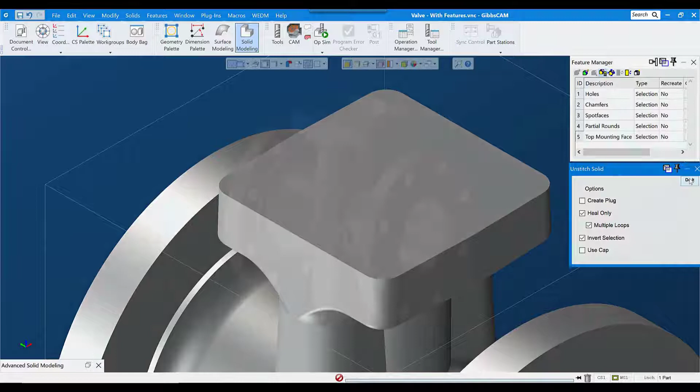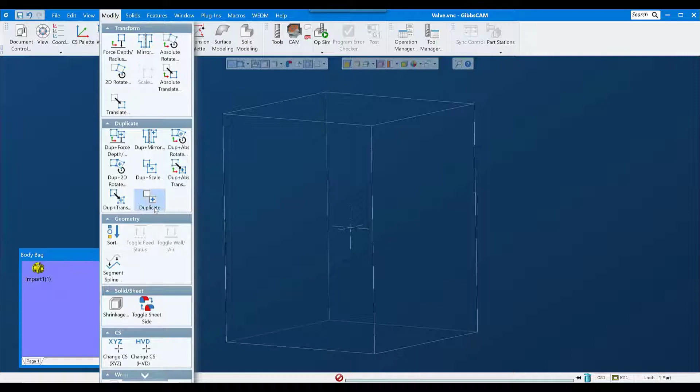This valve body is a fairly straightforward part to program, but we'd probably want a casting model, both for accurate material only calculations and to make the simulation more realistic. So I will start by placing the model in the body bag by double clicking it. While it's still selected in the body bag, I'll go to the Modify menu and select Duplicate. The shortcut key for duplicate is Control D, and that gives me a copy of whatever was selected when I duplicated.

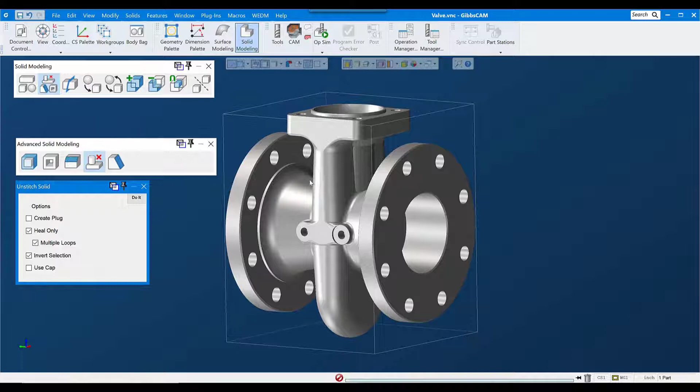I'll leave the original model in the body bag and leave it alone, don't want to change it, and I'll modify the copy. Now under Solid Modeling and Advanced Modeling, the fourth button over is Unstitch Solid. Unstitch Solid allows me to remove features from a model. And there's two modes I can use, especially for holes. The first is Edge Selection. If I turn edges on, I can select the top and bottom edge, or really any edges in a single void that break out of the model, that break out into open air, and click Do It.

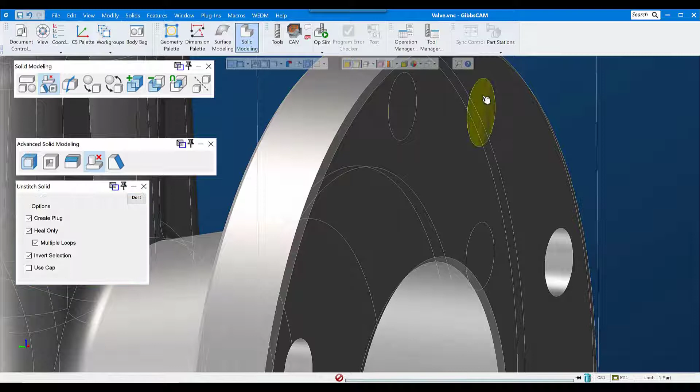Now notice that there is a Create Plug choice here. If I turn that on, there will be a negative of the space that's filled in created, as well as removing that space from the model. So here's a plug that represents the negative of that hole. Typically you would use this for core and cavity or some other situation where you need the negative of that void. Generally speaking, I'm going to leave that off for work like this.

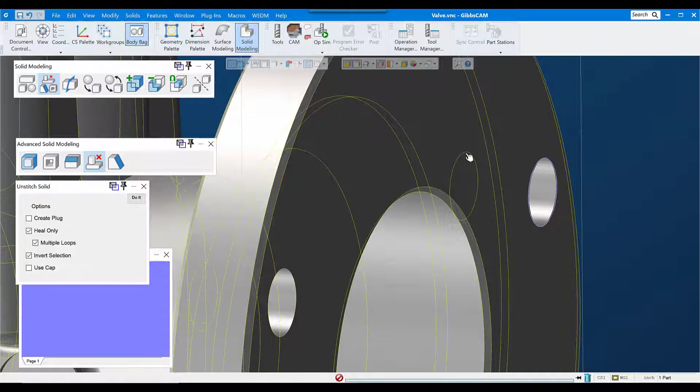The limitation to selecting edges for unstitching is that I can only do one void at a time. If I try to do multiple voids, I get a message saying edges split body into more than two face sets. So I'm limited to one edge set at a time.

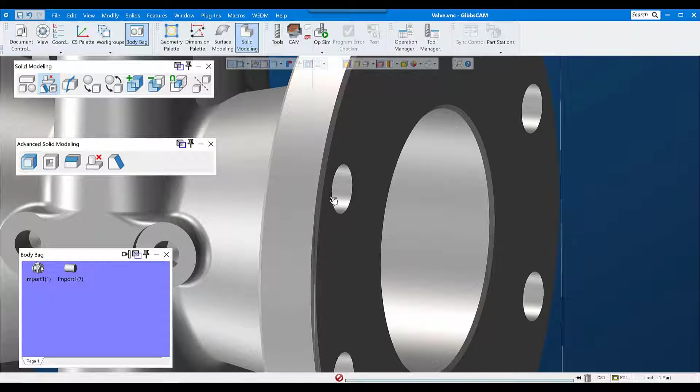Now the other mode that I can use is face selection. Face selection allows me to simply select all the faces that make up that hole, and on simple holes like these, this is probably the fastest, easiest way to do it. I get the same result as with edge selection, with the exception that I can select multiple holes or multiple voids at one time.

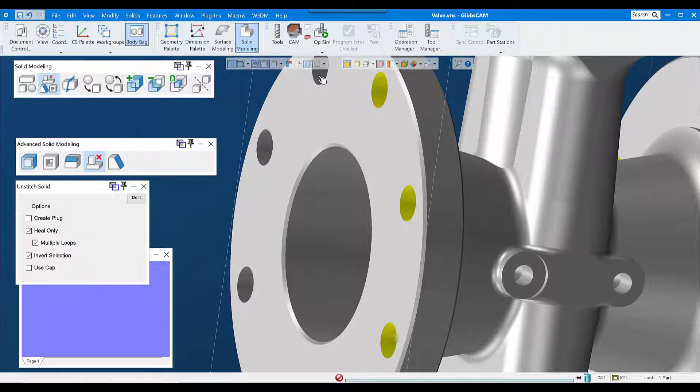But you need to remember that I have to select all of the faces that are part of that hole. So on simple holes like this, it's fairly easy and straightforward, but on more complex holes, it can be time consuming or difficult to get all those faces selected. We'll go ahead and remove these holes up here while we're at it.

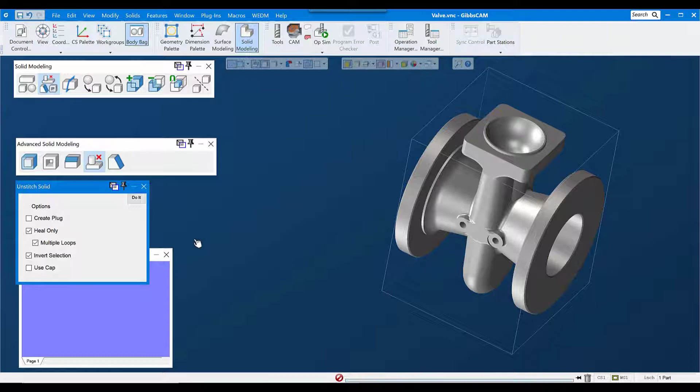Another use that I can put Unstitch Solid to is removing other features such as chamfers and fillets. As long as the software can merge the faces on either side of what you're unstitching, it will successfully unstitch.

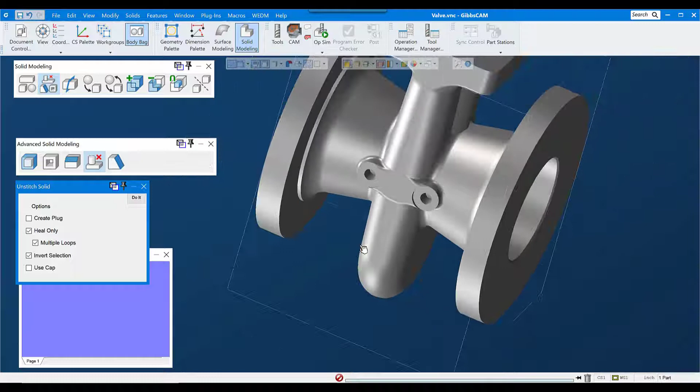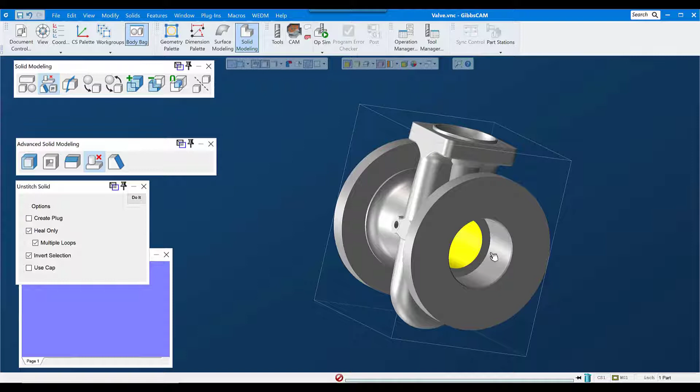Now, to remove this big cavity here, it's pretty easy to see that we have three places where that breaks out into open air, but in reality we have five because these holes also intersect that same void. So it would be a bit tedious and possibly difficult to reach all the faces that we need to reach to do face selection. So for this, I'm going to go back to edge selection and select the edges where this breaks out into open air. So we'll get the three big ones, as well as these two smaller ones.

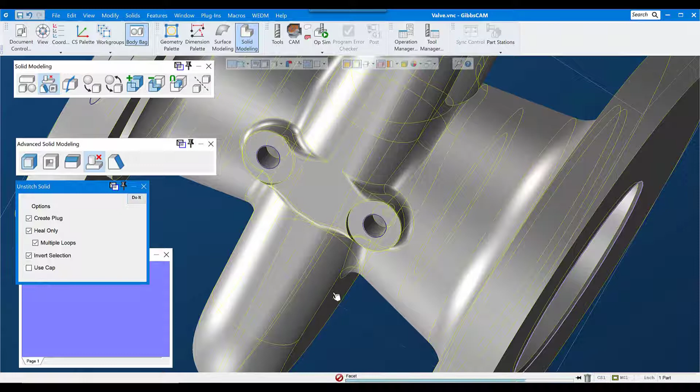And we'll unstitch that. Now in a situation like this, sometimes it's handy to turn on Create Plug, which can give us a negative of the space that was filled in, which sometimes is handy for making sure you understand exactly what's going on inside the part. In this case, it's really not necessary. I'll go ahead and delete it and bring our model back out.

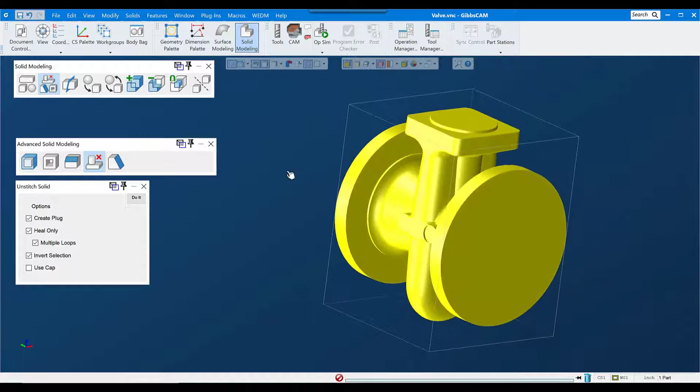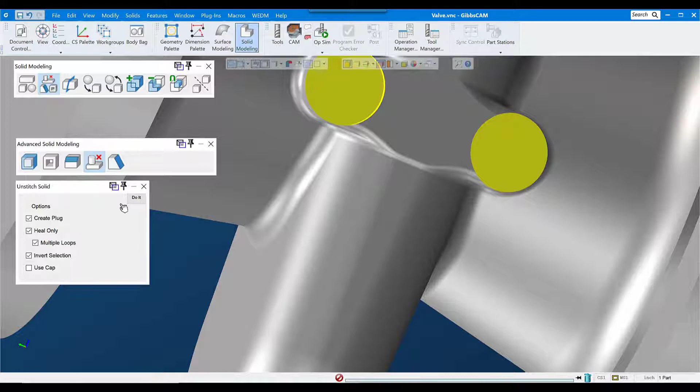Now, just one more thing, you're not limited to chamfers, fillets, and radiuses. You can also unstitch bosses and counterbores, spot faces; as long as the software can merge this face to the surrounding faces, it can successfully unstitch.

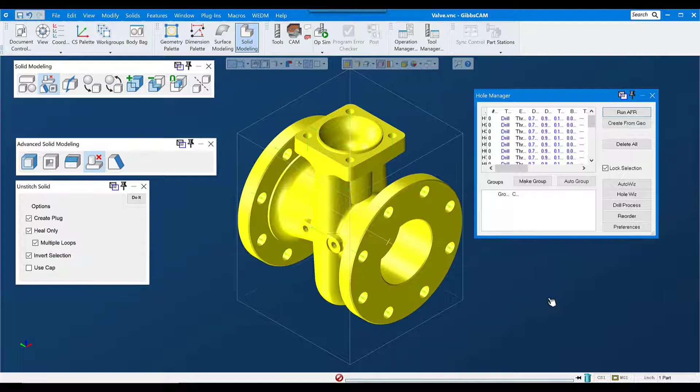Right, I'm going to put this in the body bag, and I'm going to duplicate this part one more time. And I'll show you, I guess you could call it a trick, for selecting a lot of holes at one time. This is handy if you have a part that's got a lot of holes in it or more complex voids that need to be filled. And that is under features, using the hole manager and running automatic feature recognition to find all of the round voids in this part, which it has done, and I typically would auto group them, and I can go through and select a group at a time and unstitch those.

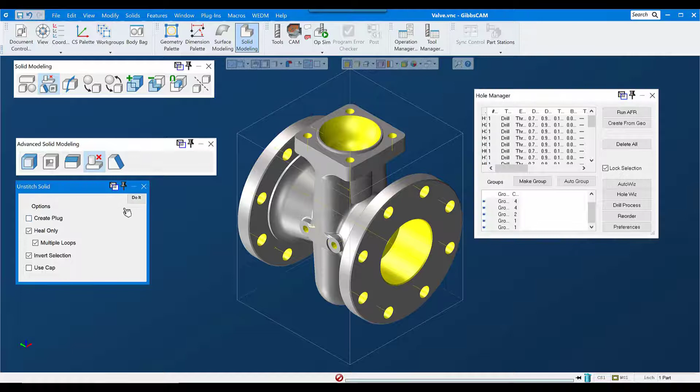Or if I know that I want to just remove all the voids from this, I can select the top through the last group, so select all of these groups, and while they are selected, I can just unstitch them all. I don't want to create a plug here. So that's a way to quickly select a large number of holes or voids at one time.

In this tech tip video, we examined using the Unstitch Solid command to defeature a model. We might want to do this to create a stock body representing a casting or forging, such as what we were starting here, or representing a part with some of the features already machined in prior setups, or possibly to create a process model to make it easier to achieve the toolpath that we're looking for. For instance, a 3D face that's got some small holes in it that we want to remove just so we get a continuous toolpath without the software paying any attention at all to the holes.